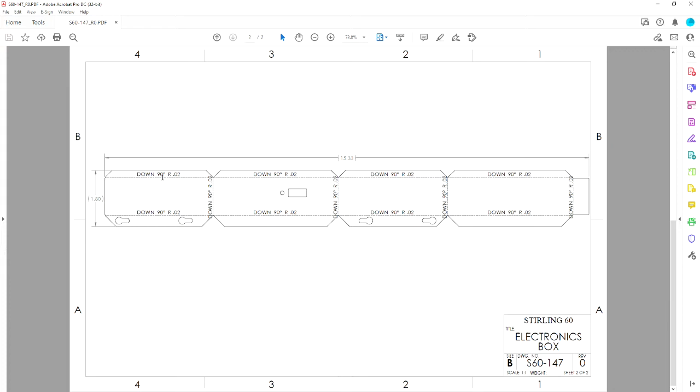Now those cutting machines tend to be not too precise on holes, so this little 1/8 inch hole here, you probably in real life would either punch it or use a drill bit to come back, but it still would be an operation that could be automated through CAM. So the end result for CAM is really this page here, page 2, is you'd export the outside profile. But let's get going without any further ado on the model itself.

And we're going to go to SolidWorks. Okay, so we're going to open a new part as usual. And I'm going to go ahead and save that part, and I'm going to call it the 147. And before we do anything, we're going to right click and pick on Toolbars, and we're going to make a toolbar that's not visible by default, and that's the sheet metal.

Okay, it defaults to throwing it over here on the left edge. If you're going to use it a lot, you can add it as a tab up here at the top through your configuration, but for today we're just going to run with the default settings we have here at the lab. Okay, so for any sheet metal part, or any part for that matter, you have to start off with a base feature. And that base feature could be just an extrusion.

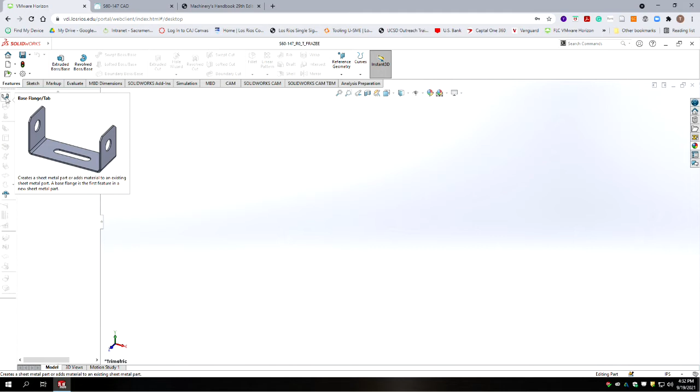But we're going to use this tool here called Base Flange/Tab. And what this does is allow you to draw a two-dimensional outline of your part and add thickness to it. So it's a very quick way to trace the profile of the part, a major profile of the part as it would have been bent.

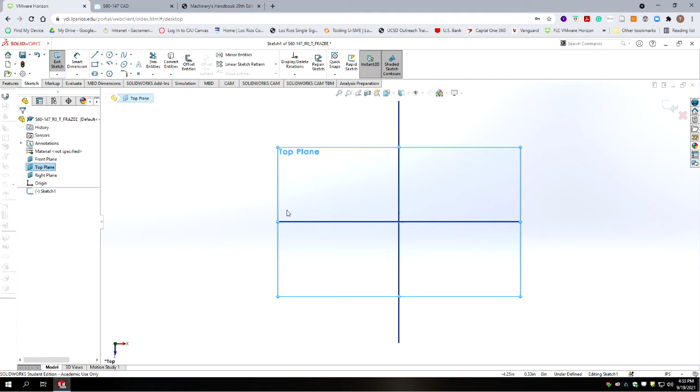Okay, we're going to make our planes visible. I guess it's the bottom or top view in this drawing. Let's do that. We'll draw on the top plane, same as our drawing. So we're going to go to the top plane. We're going to hit Sketch, and we're going to go back and reference our drawing. And our dimensions are called from, in the top view, the bottom right corner.

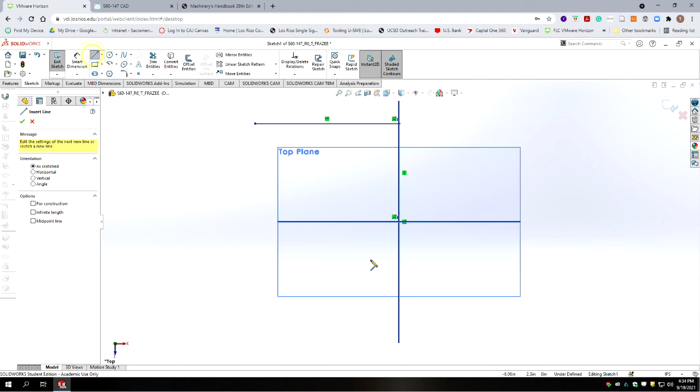So we're going to draw a line that starts there. It's going to go up, and it's going to stop there. And then we're going to draw another line that goes from the bottom. It's going to go left, and it's going to go up and stop there. What we're doing is we're leaving an intentional gap where we would have our final fold over to make the entire shape. So we just want a box, but we're going to leave some spacing here.

Okay, so let's throw some dimensions on this. Our box is 4 inches wide by 3.5 tall. Okay, those are our major dimensions.

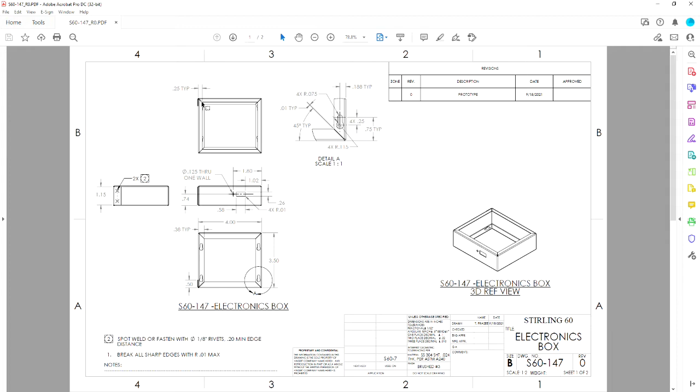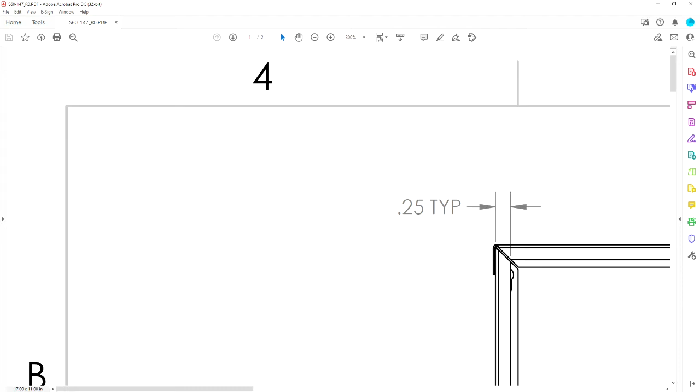Now, according to our drawing, if we look at the top view, we have this sheet metal part come over, bend over, and it goes over this other part. So we need to have a gap here, and it needs to be about a material thickness.

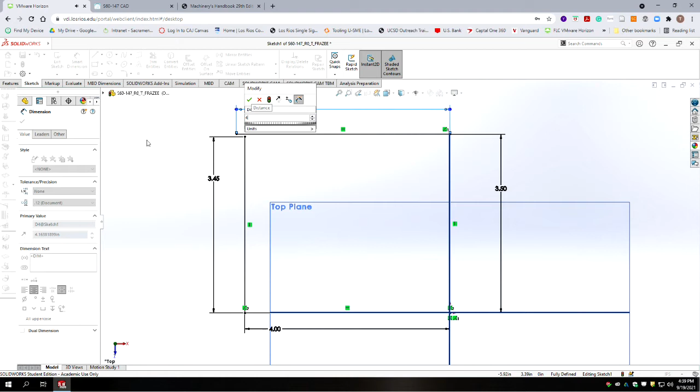So we're going to make the dimension on the left leg 3.450 inches. So we want to make it shorter. We're leaving 50 thousandths of clearance there for a bend radius. And then our top dimension is going to be basically 4 inches minus 24 thousandths, which is going to give us 3.98. If we go to 3-place decimal points, it's actually 3.976. Okay.

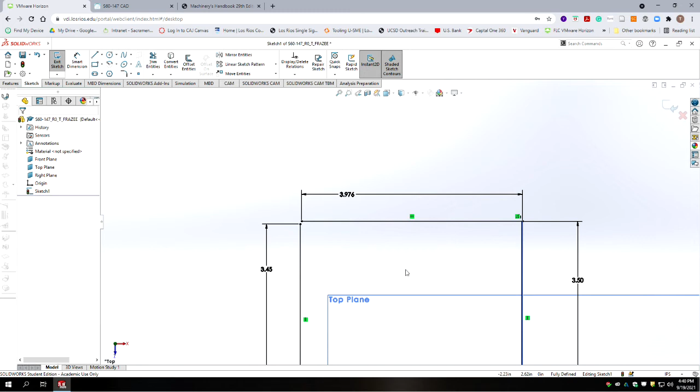That's based off the sheet metal thickness and our sheet metal being offset from the outside to the inside of the part. So again, these are going to get thicker going in each subsequent direction. But the overall outside dimensions of the box are going to be maintained at 4 inches by 3.5 inches. Okay. So we've now made our sketch. We're going to accept our sketch. It's fully constrained. And then we're going to go to our sheet metal command.

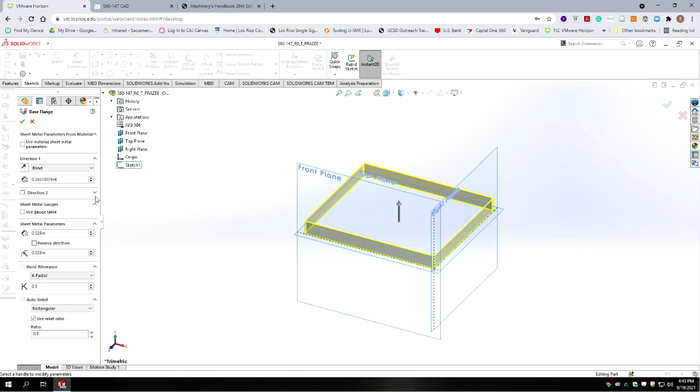Overall height of our part is 1.25 inches, in one direction. We're not going to use the gauge table. Our sheet metal parameters is 0.024 thick material. And we're going to use K factor with a bend allowance of 0.44, which is for stainless steel of that thickness. And our bend radius is going to be 1 material thickness, so 0.024.

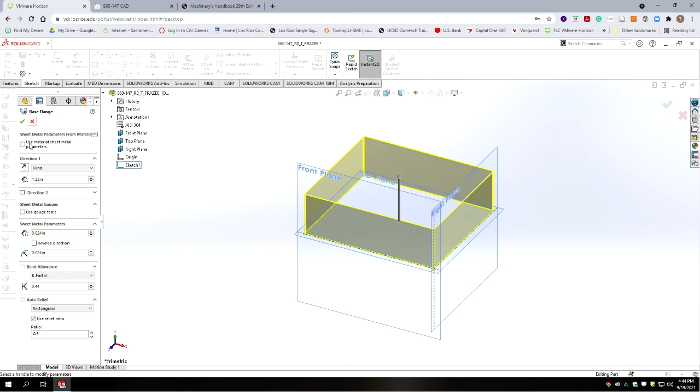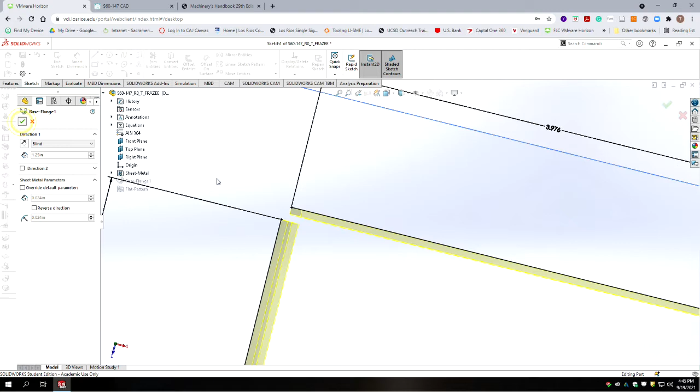Okay, we're going to accept the relief ratio. It's going to make its own relief, and it's set at 0.5 of a thickness. So that's pretty much all we need for this, and we're going to hit accept. Okay, so we've now made our base flange. As you can see, it's created thickness on our material, and it's offset to the inside of the lines. Okay, so there we go.

All right, now we need to add flanges for the things that bend over the edges. So we have flanges on both sides of the part. They have a different width. The ones on the top side that we're looking at are 1/4 inch wide and 3/8 or 380 thousandths on the bottom. So let's go back to our model. And we're going to now have these other commands that are available. So we're going to use the edge flange command first.

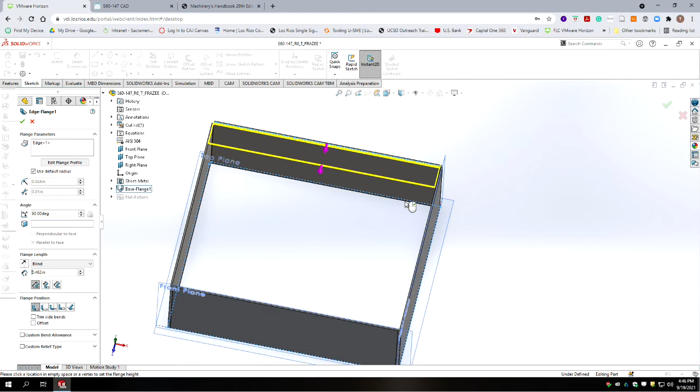So we're going to select edge command, and we're going to select the inside edges of our box. And I don't really like this, but it wants to keep going to defining the overall length of the flange right after you've selected. But if you have multiple flanges to select, you got to keep picking this flange parameters box. Okay, so our default radius is 24 thousandths.

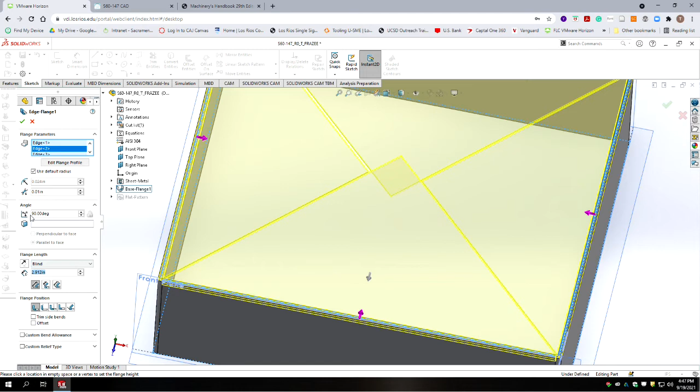Our gap between our folding parts right now is set at 10 thousandths. The bend angle is 90 degrees. And the flange length is going to be blind, and on this side it's 1/4 of an inch, so 0.25. Alright, and so it automatically will put in the bends, the bend relief, and a 10 thousandths gap in between. And you have trim side bends. You can select different places for the bend selection. The default I have keeps the box at the overall height, which is what was originally selected. And there's some custom parameters you can set, but we're going to leave those as default.

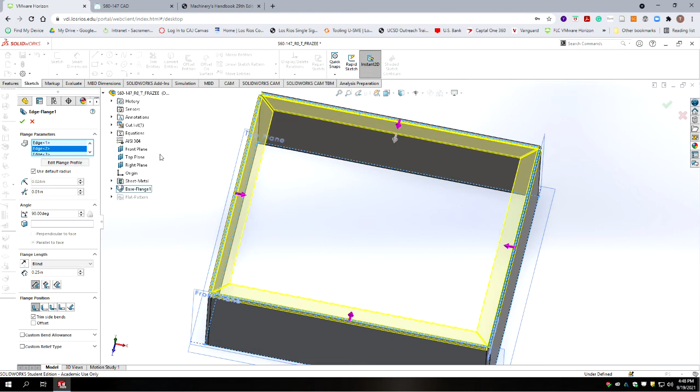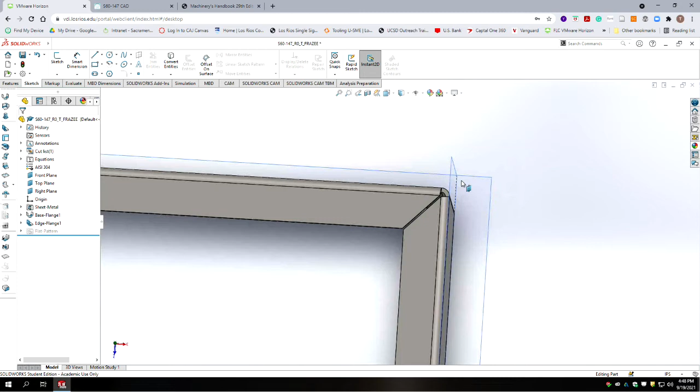Okay, so you should have a yellow preview of all 4 sides of the flange bending in. We're going to accept that. Alright, and we have a slightly larger gap on this side, which is where we're going to add a flange where this is either riveted or spot welded together. And that extra space will give us some adjustment room to work with. Okay, so we've got our bend relief in the corner, and our base flange already had the radiuses bent in it.

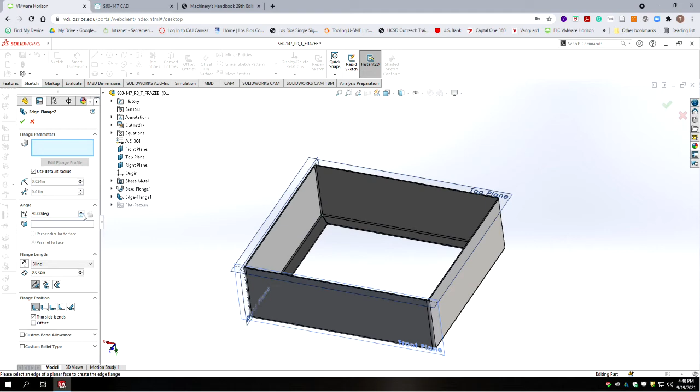Okay, now let's flip the part over and look at it from the other side, and we'll put our wider flange on this face. So we're going to go back to the Flange tool again, and we're going to pick on the inside edges again.

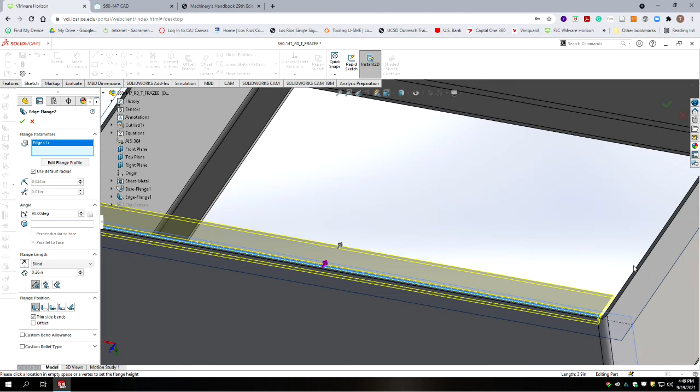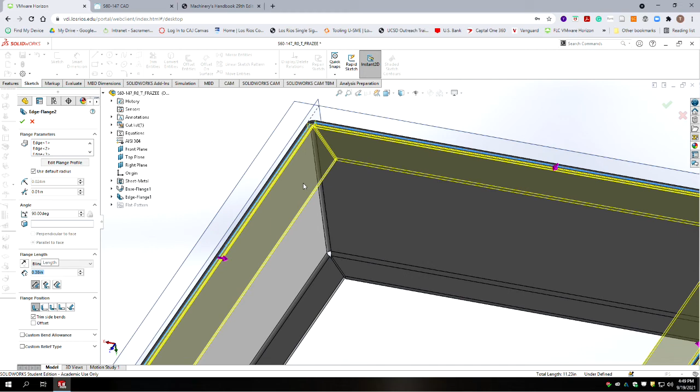Let's try holding the control key down while we're selecting these. No, it doesn't make any difference. Kind of annoying. Okay, so I got my 4 edges. We're going to set our width of flange at 0.38, which is what our drawing says. So we should have similar flanges to what we have on the opposite side. They're just a little bit wider. They should all face in.

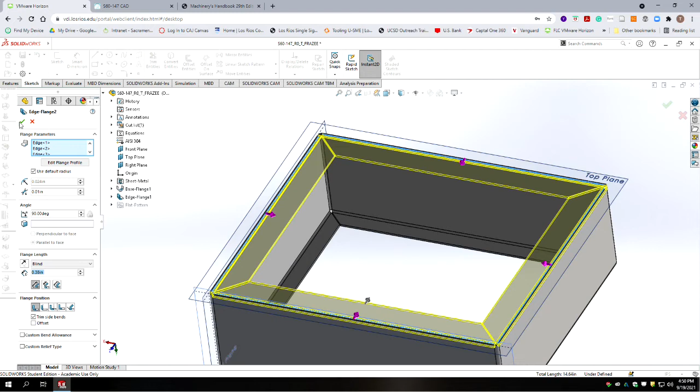If you have trouble with what direction they're facing, you pick on this, double click on the arrow, and it'll change directions. And we're going to accept that result. There we go. So we got our bends in the opposite direction.

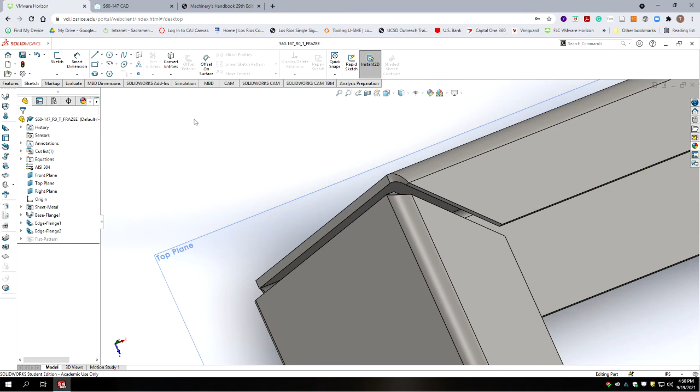Now let's return to looking at the top of the part. We're going to do our last flange. It's going to be here on the edge. It's going to flip around the corner here. It's probably a good time to save. Okay, so we're going to go to the Flange tool again, and we're going to select on the inside edge. And here we don't want it to interfere with the side of our part. So let's go ahead and click to give it a direction.

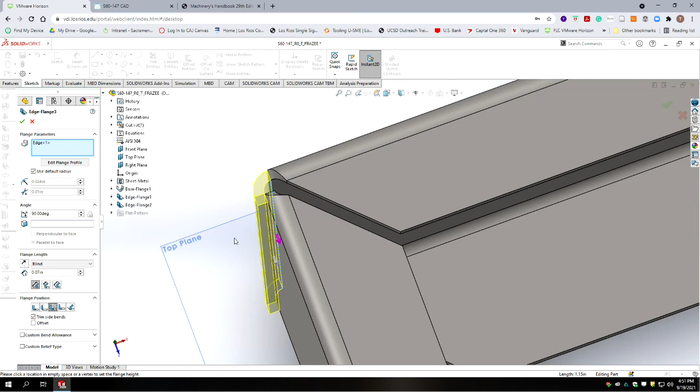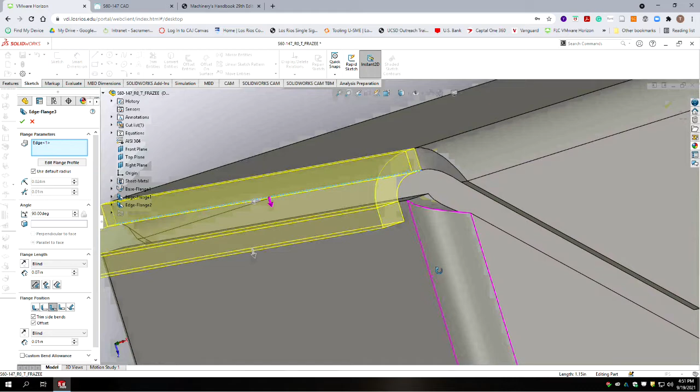We're going to do bend outside, and this will automatically go to the outside of our box. And then we're going to add on an offset, and that offset is going to be 0.01. And what that's going to do is leave a 10 thousandths gap for tolerance for us to make adjustment. Okay, and the width of our flange is going to be, according to our print, 1/2 inch.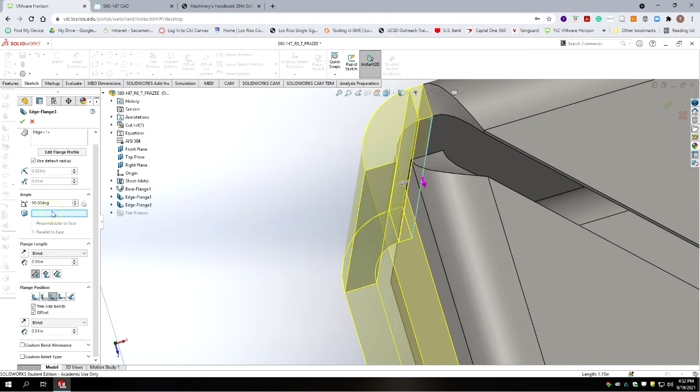So 0.5. Okay, so you should have a flange sticking a 1/2 inch out from our material. Okay, we're going to accept that. And we've got our flange. So when you fabricate this, we'd either drill a couple holes through here and rivet it, or if you can get a spot welding tip in there, spot weld it in a couple places.

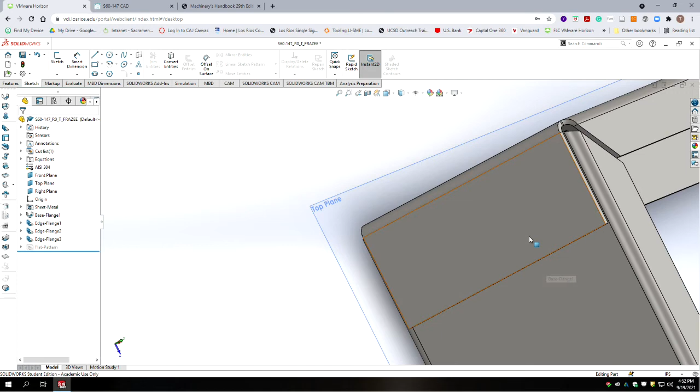Okay, that's it for the actual sheet metal commands for fabrication. Now we need to just do some plain old extruded cuts to put the rest of the features in. Okay, so always a good time to save. And let's look at our drawing. We have a square hole and a round hole to put in the front face. So that is the face that has the welded flange on the left, and we're looking at the front of the box. So the thicker bent flanges are going to be on the bottom.

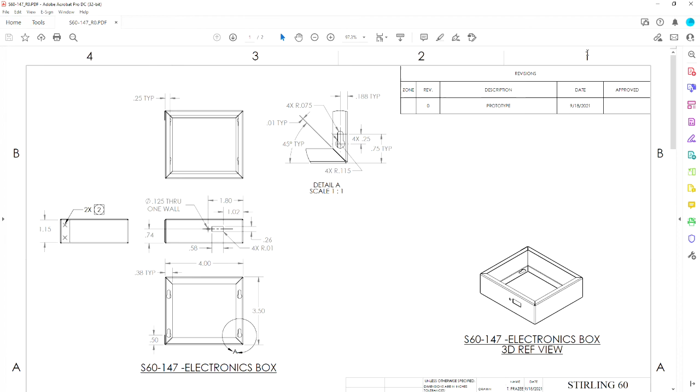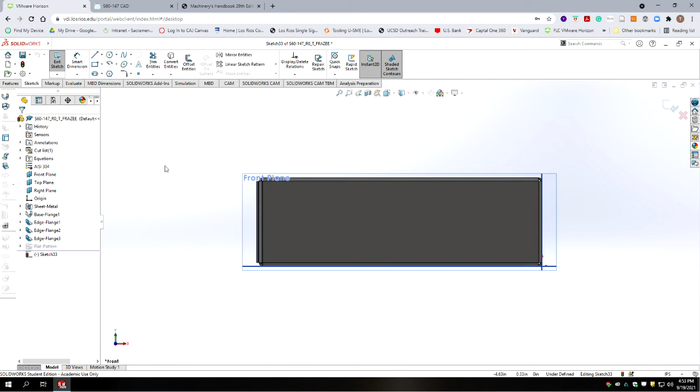We're going to start off with a rectangle. Okay, so we're going to sketch, and I think we have it orientated correctly if we just pick on the front face. We have the correct side of the part. We're going to look at the model normal to that sketch, and we're going to draw a rectangle. Okay, we're going to accept that rectangle, and then we're going to go ahead and draw our circle off to the left. We're just going to do this in one feature. Okay.

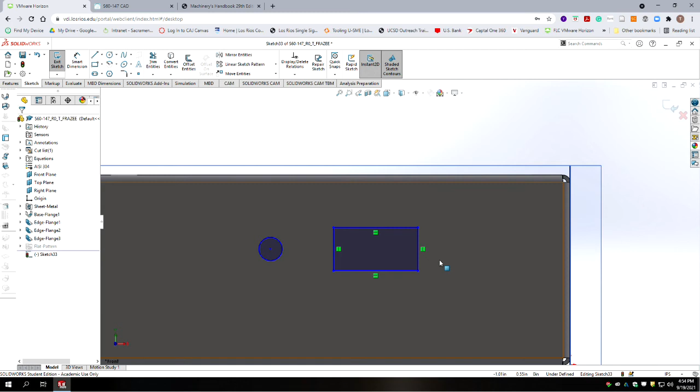So let's give our box a width, and let's see what that width is on the drawing. It is 580 thousandths, so 0.58, and its height is 260 thousandths. Okay, and the circle is 0.125, or an 1/8 inch in diameter.

And then if we look at our drawing, the box and the circle center is 740 thousandths from the base. So that's on center line. So let's mimic that in the model. So if I take a center line and go from the midpoint of our right side of the box, and draw a center line horizontal, I get that result. And if I take the center of our circle, hold the control key down, and highlight the end of our center line, we can merge those points.

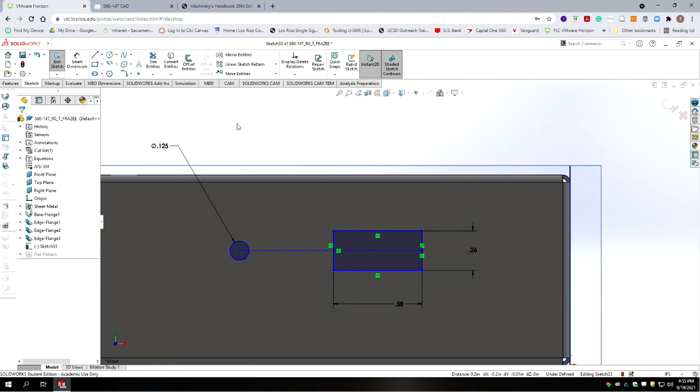Okay, and then we have a dimension that goes from the bottom of the part to that center line, which is 740 thousandths. So we're going to take a dimension from the plane to our center line and over. We're going to type 0.74. And then we have dimensions that give the spacing. So our spacing between the right side of the box and the hole is 1 inch 800 thousandths.

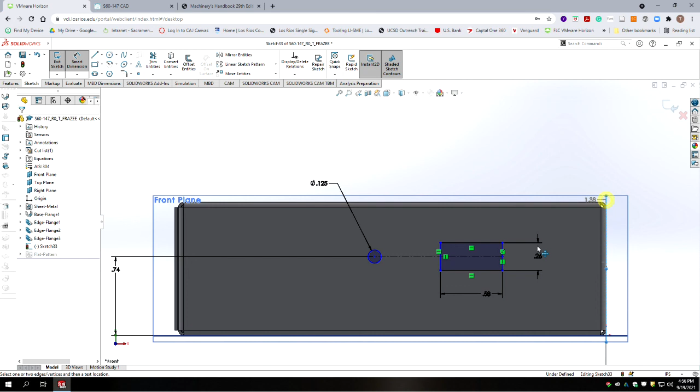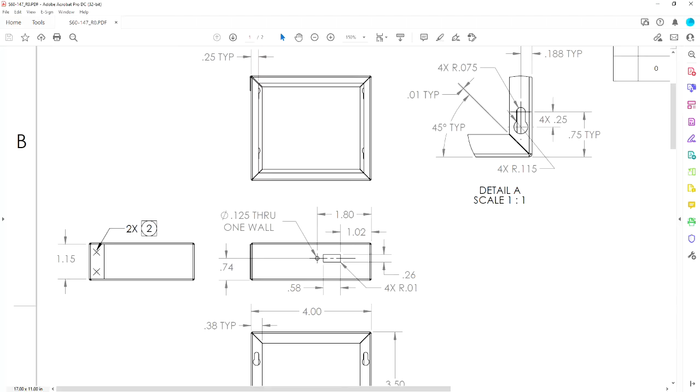So we're going to go from the right side plane, not sure what's going on there. From right side plane to the hole, which is 1 inch 800 thousandths. And then if we look at our rectangular cutout, it's 1 inch 20 thousandths from that same edge to the right edge. Alright, everything's black now. We should have a fully constrained sketch. We're going to accept that sketch.

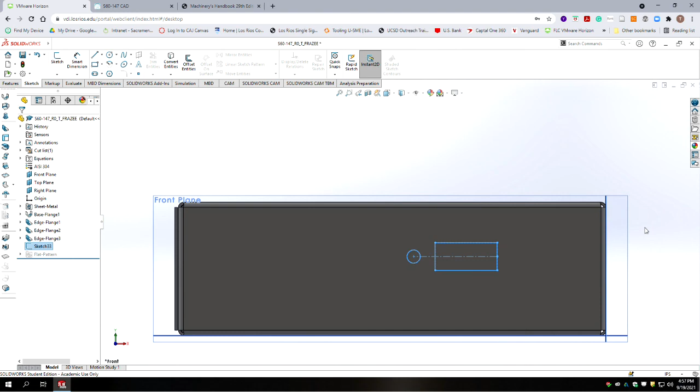We're going to look at it in a 3D view. And our drawing says that cutout goes through just this one wall. So we're going to go Features, Extruded Cut. And we're going to change it from blind to up to next. So it's just going to go up to the next surface, which is the back side of the sheet metal. And we're going to accept that. Okay, so we've got our hole.